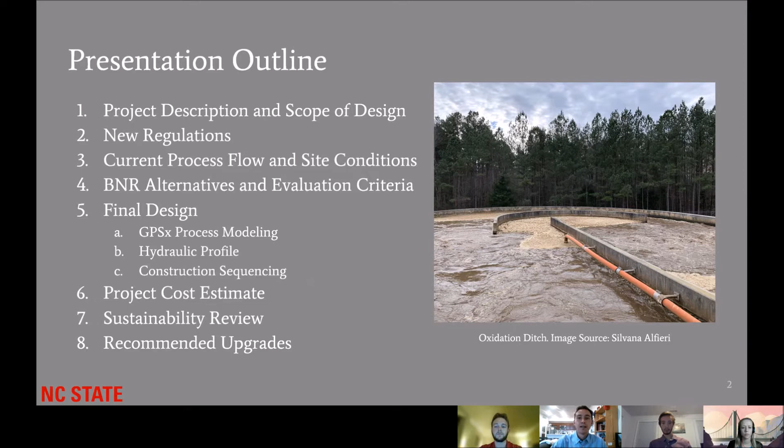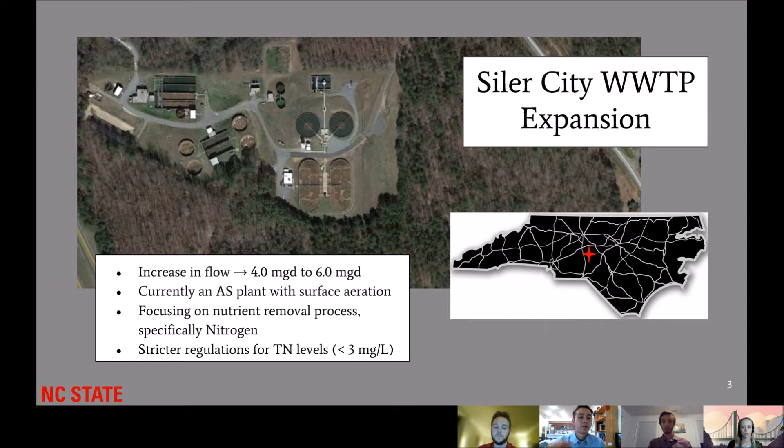Here is an aerial view of the current Siler City wastewater treatment plant. It's an activated sludge wastewater treatment plant, and you can see the two oxidation ditches on the bottom side of this image. There will be an increased demand caused by 2 new commercial sites, so it'll go from 4 to 6 MGD in the coming years. The main focus of our project was on the new nitrogen limit. They used to only have an ammonia limit for this plant, but the new permits associated with the upgrade are now regulating nitrogen.

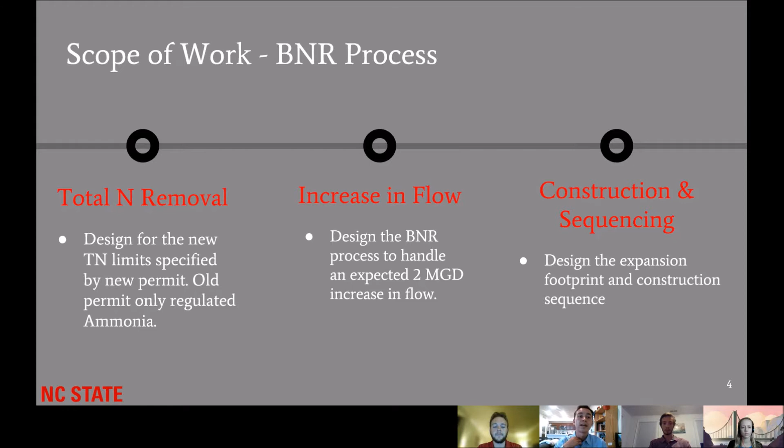So I'm going to now reiterate the scope of our work. We are focusing on the biological nutrient removal process, the BNR process, specifically the removal of total nitrogen. We're focusing on the increased flow associated with those 2 new commercial sites, and the construction and sequencing surrounding the BNR process specifically.

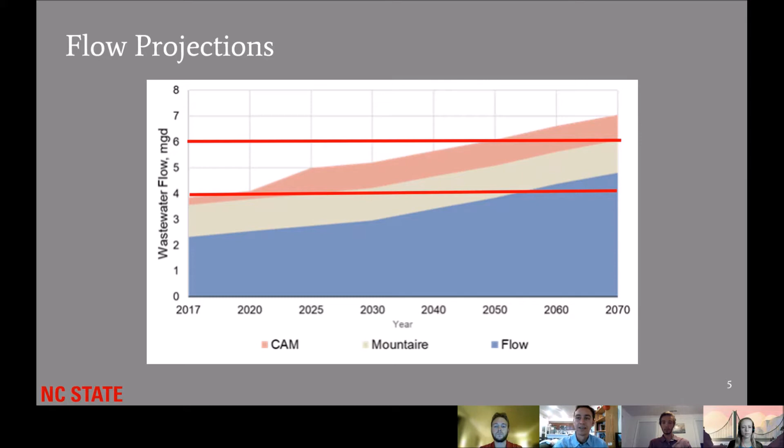And the top line is our expansion flow peak, so that is what we're trying to expand to.

With that, I'm going to pass it on to the other Kai, and he will walk you through our decision matrix for selecting the alternative.

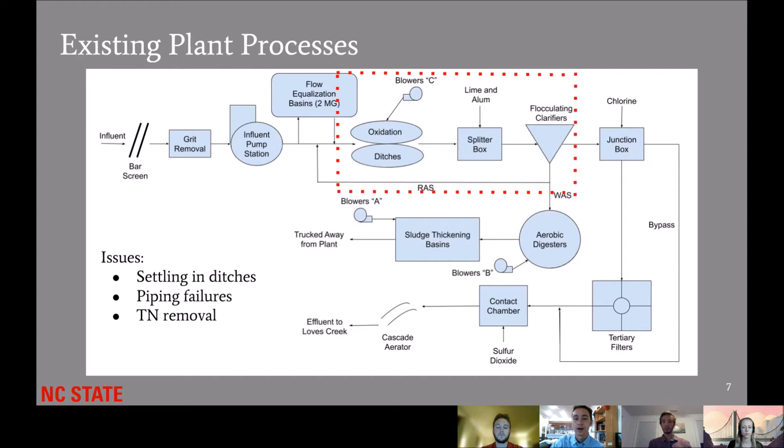The 3 best alternatives for upgrading the plant so it will meet its new permit limits are listed in this decision matrix, and they were scored based on construction footprint, cost, nutrient removal effectiveness, operator familiarity, and ease of implementation.

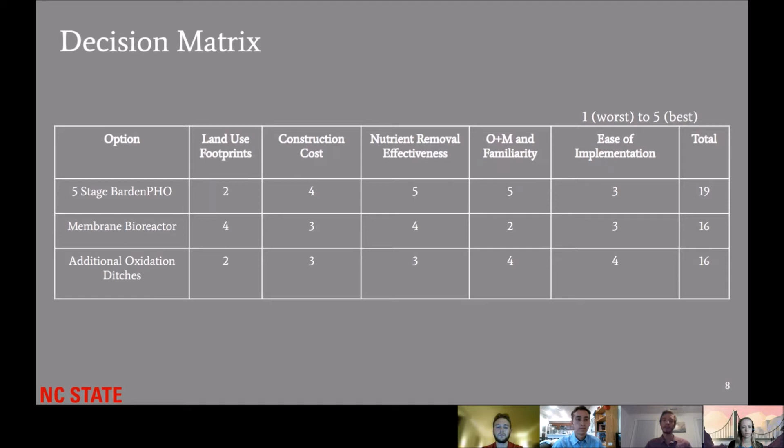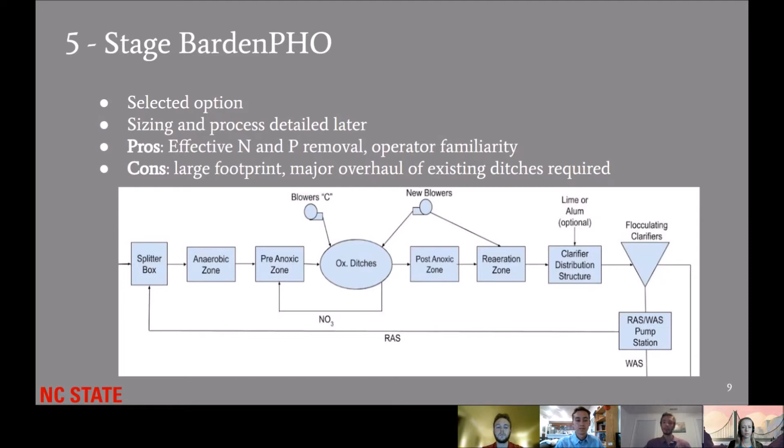Our highest scoring alternative, our best option, is the 5-stage Bardenpho process. Implementing it in this wastewater treatment plant will involve the construction of new basins around the existing oxidation ditches. More specifically, the plant will be upsized from 2 trains, where already there's 2 trains with the 2 oxidation ditches, to 3. The new anaerobic, pre-anoxic, post-anoxic, and re-aeration zones will all be new, and we'll be able to create 3 trains for this new flow and new nutrient removal limit.

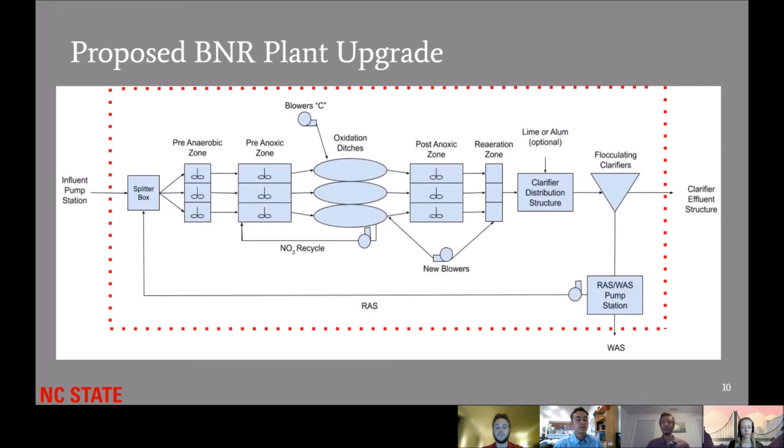Doing this will enhance just the oxidation ditches, where currently nitrogen in the form of ammonia is being metabolized into nitrites and nitrates, but still showing up in the effluent wastewater, making the total nitrogen too high for the limit. So the addition of anaerobic and anoxic areas will allow that nitrite and nitrate to be removed as nitrogen gas.

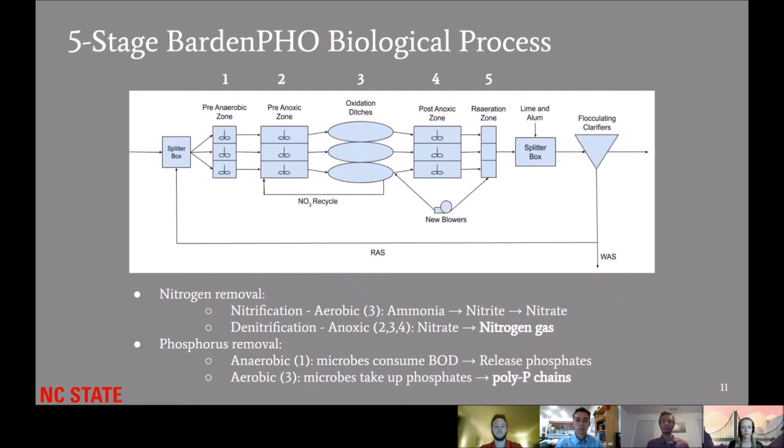The addition of this process will also be able to remove phosphorus biologically, where anaerobic zones make phosphorus available as phosphates. Those phosphates then enter oxidation ditches where they're uptaken and settled out in flocculating clarifiers. Currently, they just use lime and alum addition to help flocculate phosphorus, so this will be an added benefit to adding this process to what's going on right now.

So we used Hydromantis GPS-X software to model the current process of the plant. Doing this was crucial because we're choosing to build around the existing oxidation ditches and clarifiers. So we needed to calibrate structures in this software to match the process that's going on at Siler City.

We did this by using historical data from influent and effluent wastewater, along with the dimensions of the oxidation ditch, the hydraulic retention time, the flow rate, and the dimensions of the clarifier too.

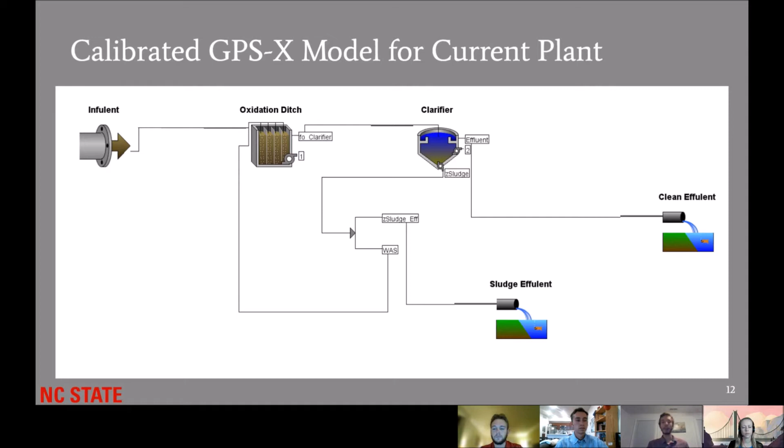We were able to manipulate dissolved oxygen levels in the oxidation ditch to match what the effluent was showing up as historically. And this graph shows that.

As you can see, the total nitrogen is way above what the limit's going to be at 3 milligrams per liter. So something definitely needs to be done.

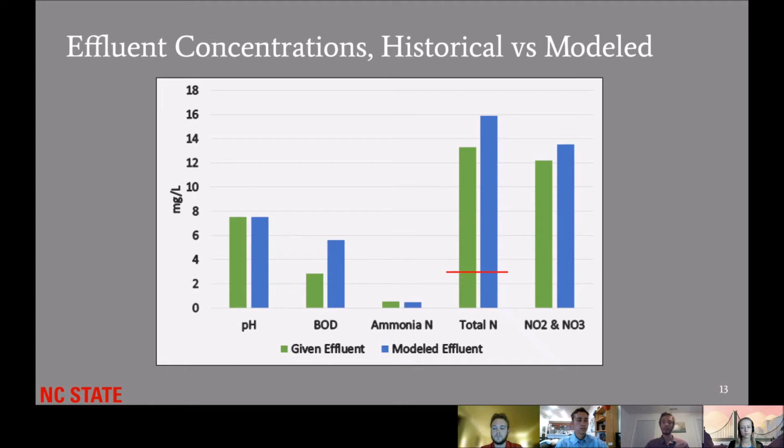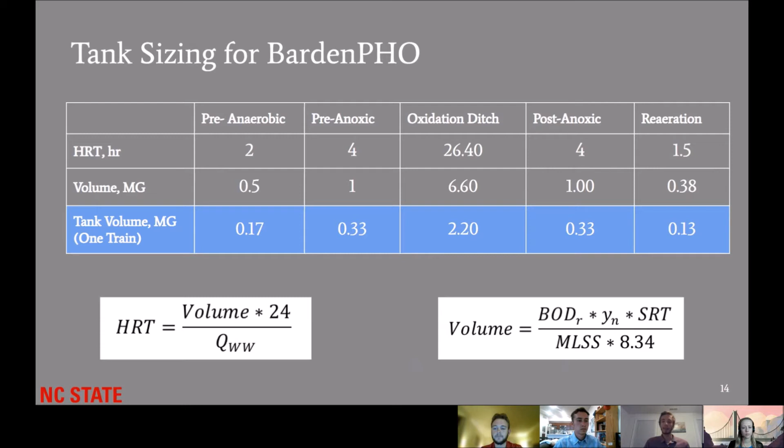And with these values, we put them into the Hydromantis GPS-X model and built them around what we had as the oxidation ditch and the clarifiers.

Manipulating the dissolved oxygen was what made these basins unique, because anaerobic, pre-anoxic, and post-anoxic zones have very little to no dissolved oxygen.

We were able to find out that the diffused air grids are crucial in this process for upgrading the plant because they're what's going to be able to manipulate dissolved oxygen.

We found with this model that it could reduce the total nitrogen from influent coming in, as you see here, down to below 3 milligrams per liter. But to do this, the aeration systems need to be upgraded at this plant.

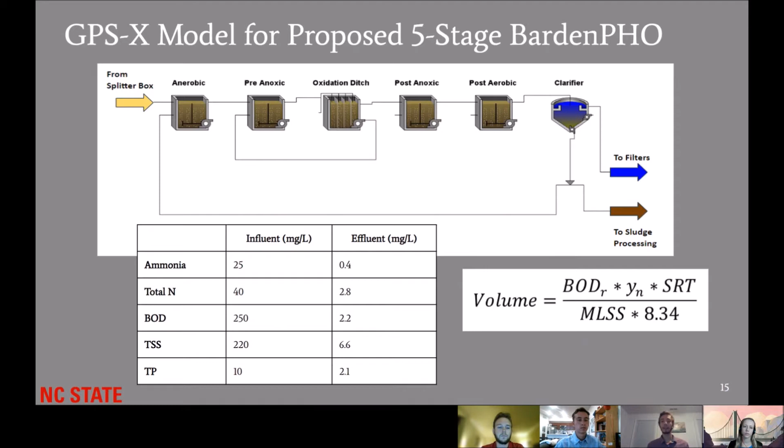The star of the show is total nitrogen. So on the next slide, Drew's going to talk about the new air requirements of the plant to meet these nutrient limits.

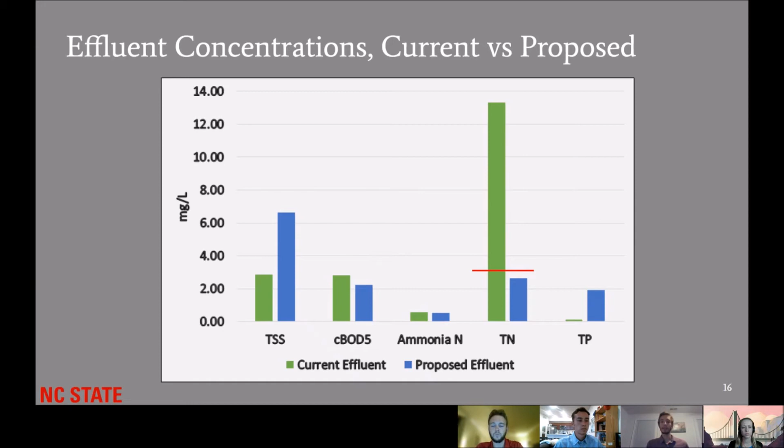So using the model, along with literature review, we were able to come up with airflow requirements that would help drive the 5-stage BardenPho process. As Kai spoke earlier, the plant currently uses blower area staging area C to feed their oxidation ditches. We quickly found out that that would not provide the capacity needed for the upgrades to the BNR process.

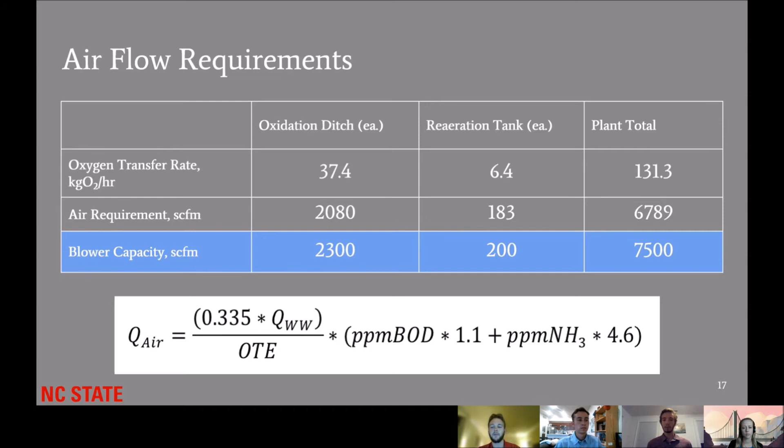We upsized those by about 10% to get the blower capacity that would be required for the plant as a whole. Moving on to the next slide, we began creating a hydraulic grade line for the existing plant, and then here the upgraded plant.

We looked at minor losses and major losses to come up with one pipe upsizing that would be required from the influent pump station all the way back up to the head of the BNR process.

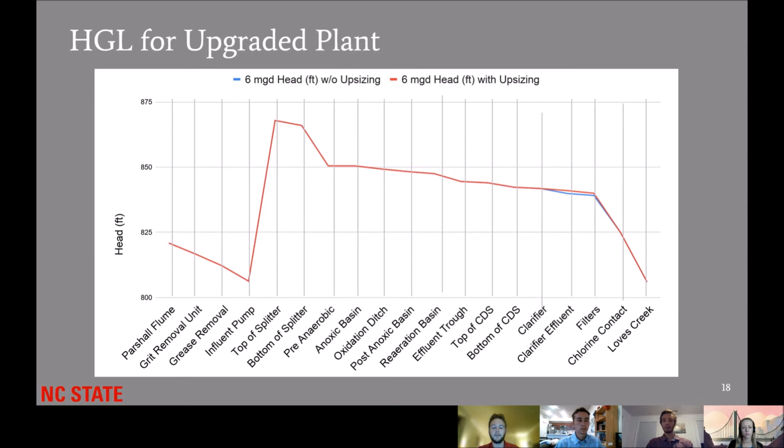Now, given this land constraint, we decided to come up with a new plan view of the plant on the next slide.

Everything in white is the existing plant as it sits. All the structures outlined in black are what we plan to include in the new BNR upgrades.

Starting further south on the plan layout, there's a new influent pipe from the IPS that will be upsized to 24 inches to feed the splitter box that will split flow into 3 equal trains. There will also be a new RAS line, return activated sludge, that runs from the RAS/WAS pump station at the back end of the process.

Just north of the new splitter box, we're proposing a pre-anaerobic and anoxic structure. There'll be mixers located in all these zones. After the pre-anaerobic anoxic structure, flow will travel to the ditches, where we'll completely rehabilitate the existing ones along with build a third new one.

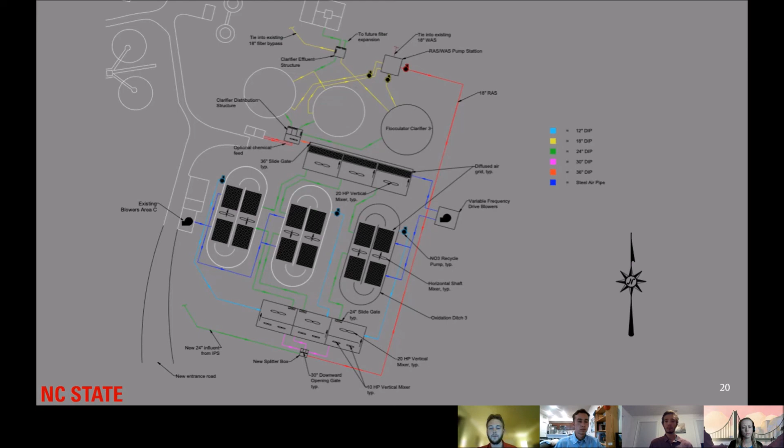Moving on to the next slide, here's highlighted all of the scope of work for the project, mainly demolishing and rehabbing old structures, along with retrofitting blower area C to have VFD, variable frequency drive blowers.

The new structure is highlighted by the third oxidation ditch, as well as a matching flocculated clarifier. We're also going to add the pre-anaerobic anoxic structures and post-anoxic reaeration structures. We'll also need a new sludge pump station for the increased sludge production that the plant will have.

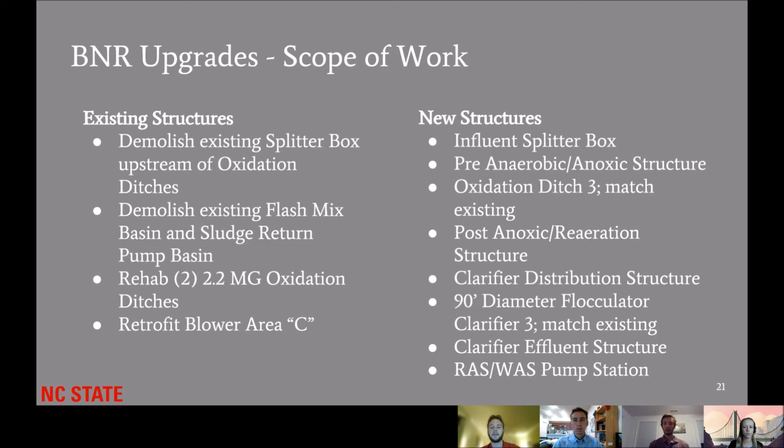On the next slide is a list of process equipment. I spoke to most of these during the plan layout. The only addition is the SCADA instrumentation controls equipment that we're going to provide for operators. This will allow them to finely tune the BNR process and ensure that they're meeting their new 3 milligrams per liter TN limit.

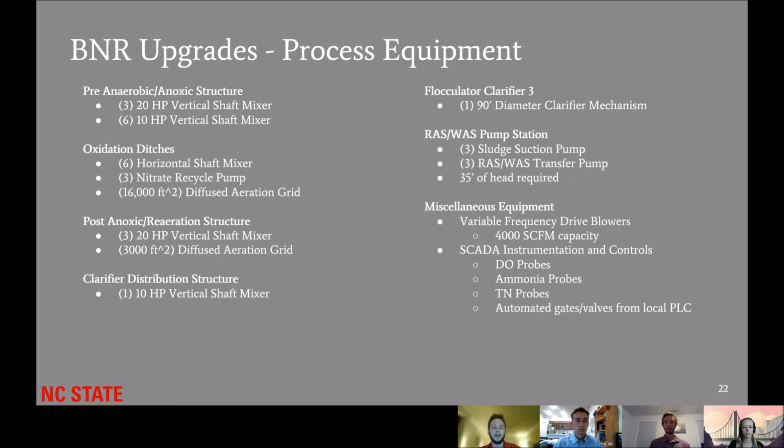And on the next slide, we're going to have Savannah go over construction sequencing for this project, as temporary operations are crucial for this plant. They cannot reroute any wastewater to neighboring facilities.

Yeah, so like Drew said, it's essential to have 2 of the oxidation ditches and their associated clarifiers online while we're constructing and rehabbing the others. So we're breaking the construction down into 3 phases.

The first phase, shown by the green icons on this aerial view, will be new construction. We will build the new oxidation ditch and its clarifier, along with the post-anoxic and reaeration structure and pre-anaerobic anoxic structure. The second phase will be taking down one of the existing oxidation ditches, highlighted in blue here, and rehabbing that ditch.

While temporarily piping the flow associated with that ditch to the newly built train, we'll rehab that ditch and build some other structures.

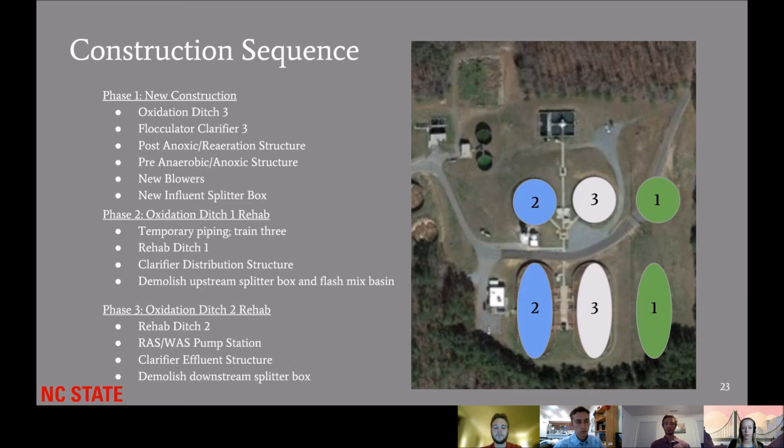In phase 3, we will take down the other existing oxidation ditch, rehab it, and build the RASWAS pump station and the clarifier effluent structure.

In our project, we also looked at sustainability using the ENVISION rating software, which evaluates project sustainability based on 5 criteria listed here at the bottom of the graph. As you can see, our project rated very sustainable in almost all the criteria, which is green.

Except it could be rated a bit higher in climate or resource allocation. So some things to address that could be using renewable energy or locally sourced materials.

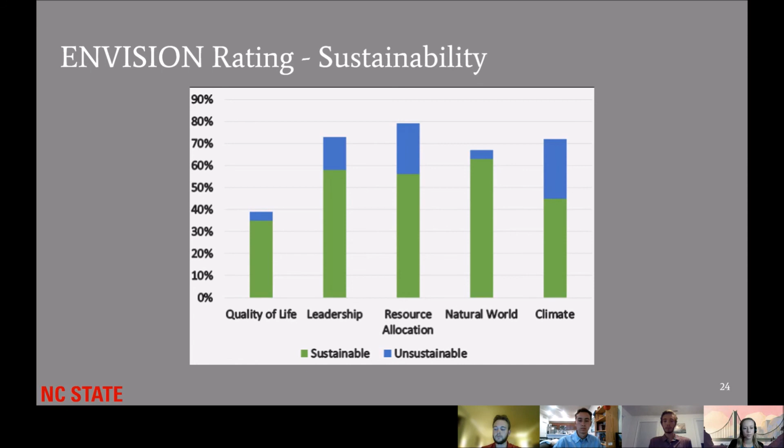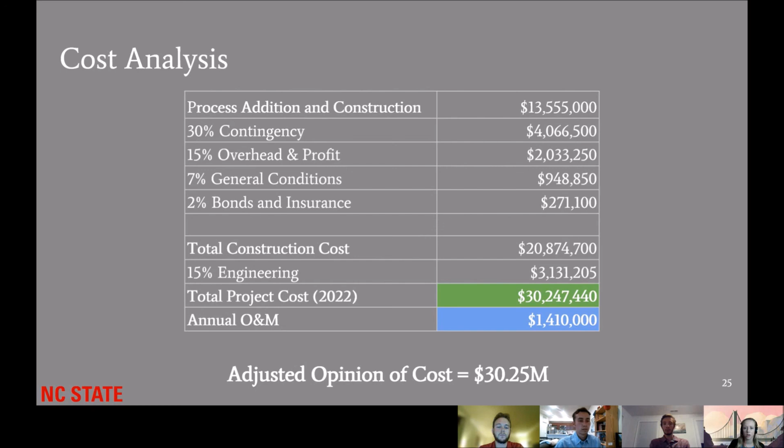Finally, we do have some recommended upgrades that are outside the scope of our work that we just want to hit on. We'll have to upgrade other parts of the plant to design for that new 6 MGD flow. That'll include some of the preliminary treatments, such as the dual bar screen, grit removal, and some of the tertiary treatment like the filters and the chlorine contact chamber.

Of course, we'll also have to plan for permits, such as the plan of approval for construction, authorization to construct, and making sure we keep in mind those new NPDES permits.